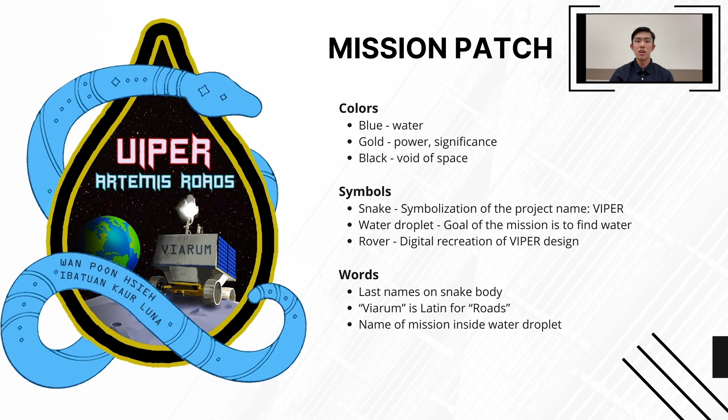Prior to creating the mission patch, we discussed many ideas that could symbolize the VIPER missions. These included adding ice or water, using a snake to wrap around the patch, incorporating past prototype ideas, placing constellations in the background, and using the shape of the Hermite crater, which is where we're going to land our rover. Later on, we decided to add our team name Viarum to the front of the rover, which is Latin for roads, and use colors that would give the mission power and significance. We fused these ideas into a patch, which we hope would stand out in its aesthetics and symbolism.

Our goal is to redesign the Artemis Roads Volatile Investigating Polar Exploration rover, known as the VIPER, focusing on optimizing the wheel design for detecting ice and water concentrations at the Hermite crater located in the moon's north pole. This aligns with NASA's goal to sustainably explore and inhabit the moon.

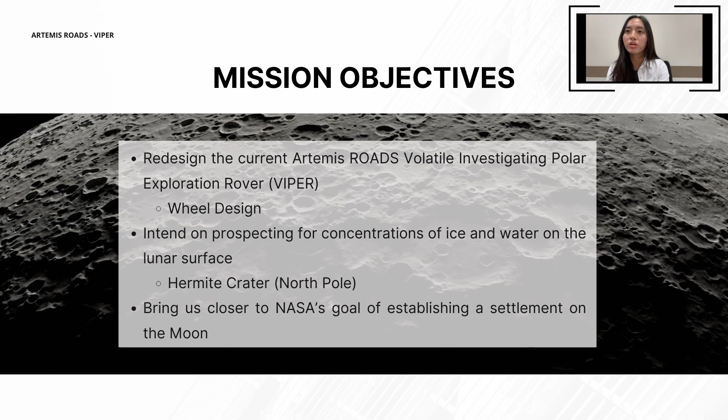Our team's collaborative approach involved extensive research and the exchange of ideas to tackle the challenges of designing a lunar rover. We began by setting our team goals and VIPER mission objective, focusing on enhancing rover performance in the Hermite crater. Next, we examined the current VIPER design to understand its strengths and limitations. We then researched potential improvements and identified the challenges. Throughout this process, we consulted with mentors and NASA engineers to gather valuable insights. Using this information, we designed a prototype incorporating our proposed improvements. Finally, a failure mode analysis was made upon our design to identify possible failure points and build its resiliency.

Artemis VIPER rover stands at 8 feet tall and measures 5 feet in both width and length. It moves at a speed of approximately 1/4 to half a mile per hour and is equipped with several scientific instruments, those being the neutron spectrometer system, the Regolith and Ice Drill for Exploring New Terrains system, also known as the Trident system, the near-infrared volatile spectrometer system, and the mass spectrometer observing lunar operations.

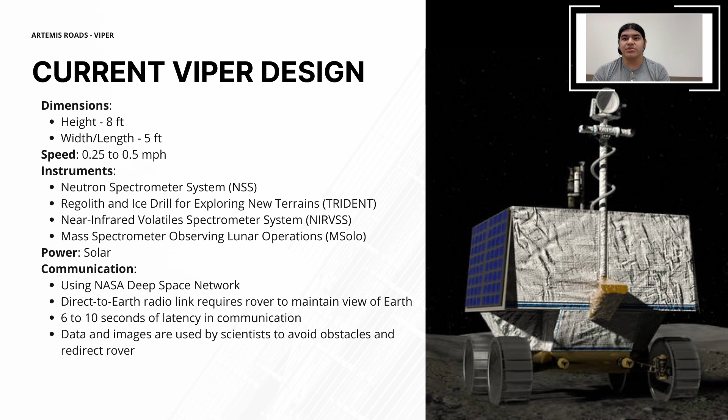Powered by solar energy, VIPER communicates through NASA's Deep Space Network, maintaining a direct-to-Earth radio link that requires a clear view of Earth. Communication has a 6 to 10 second latency, and scientists use the rover's data and images to avoid obstacles and redirect its path as needed.

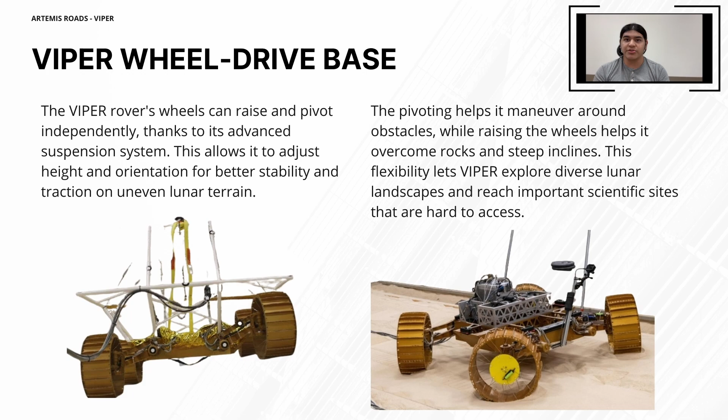The VIPER rover's wheels can raise and pivot thanks to a sophisticated suspension system that allows each wheel to move independently. This capability enables the rover to adjust its height and orientation in order to maintain stability and traction on uneven lunar terrain. This ability to pivot helps VIPER maneuver around obstacles, while raising the wheels can help it overcome rocks and steep inclines. This flexibility enhances the rover's ability to explore diverse lunar landscape, ensuring it can reach and study scientifically important sites that are otherwise difficult to access. This also allows VIPER to traverse the unique lunar landscape and terrain without the worry of a malfunction or damage to the structural integrity of the rover, whether it be the rover itself or its wheels.

In order to simulate the vertical movement of the wheel modules on the VIPER rover, we determined that we had to use a 4-bar lifting mechanism. But what is a 4-bar exactly? Well, a 4-bar lift is a simple mechanical system that is used to raise or lower objects. It consists of 4 bars connected in a quadrilateral shape, with one bar anchored to a base and the other forming a movable parallelogram. As one of the bars is pushed or pulled, the entire structure moves in a coordinated manner, allowing for controlled vertical motion.

We also decided that in order to be able to rotate the wheel, we would have to use a pivot system that could allow the wheel to rotate up to 35 degrees when rotating to either side.

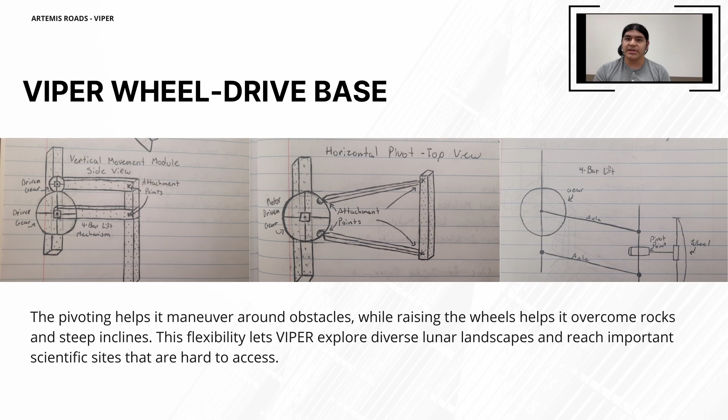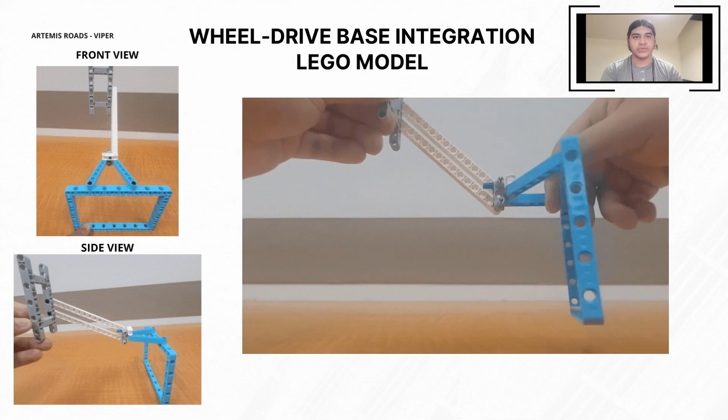In this video, we demonstrate the Lego model we've made. We made this in order to be able to visualize the mechanisms used on the VIPER's wheel modules. This would also help us eventually when we decide to scale the model into a larger structure using VEX parts. What you see here is a scaled up version of the replica we made using Lego parts.

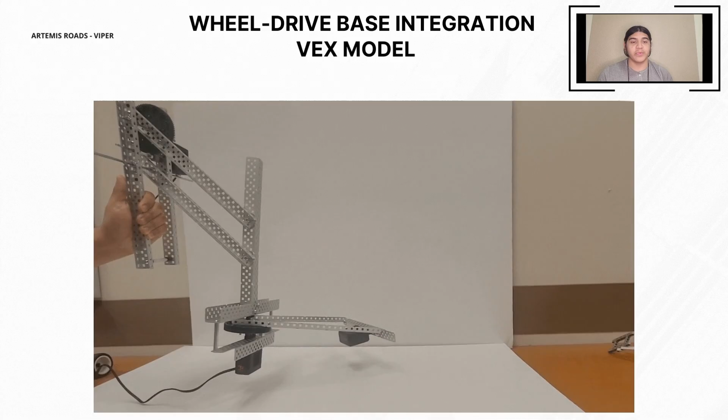However, now we're using VEX parts in order to mechanize the systems and be able to use motors to basically replicate the movements of the VIPER's wheel modules. By building a scale replica of the VIPER's wheel modules using VEX parts, we can have a hands-on understanding of the mechanical systems used and potential challenges of our wheel design.

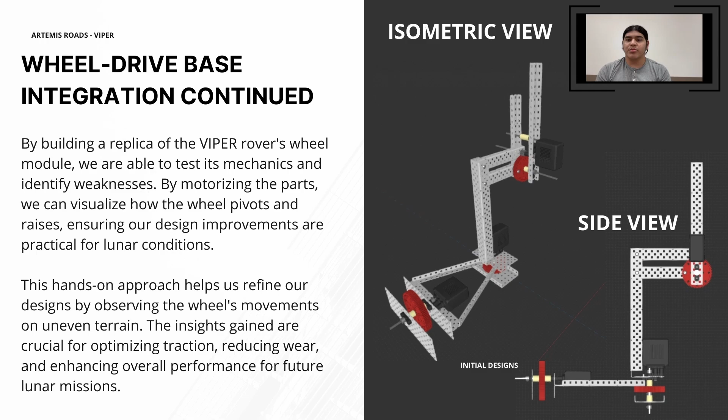By motorizing these parts, we can observe how the wheel pivots and rotates in real time, allowing us to analyze the stresses and strains on various components. This process also helps identify weaknesses and areas for improvement, ensuring that our designed enhancements are both practical and robust for lunar conditions. Additionally, constructing the module creates an iterative design approach, where improvements can be tested and refined through direct experimentation. By replicating the wheels' movements and functionality, we can gain insights into the rover's mobility and stability on uneven lunar terrain.

To further the Artemis mission's end goal of creating a sustainable lunar base, a robust and easily replaceable wheel design is critical for effective moon exploration and habitation. In current and future expeditions to the moon, rovers need to be able to quickly and reliably traverse the lunar terrain for everything from transportation of humans and goods to scientific exploration to the depths of lunar craters.

In order to effectively identify areas of improvement in current lunar wheel designs, we analyzed the existing wheels used on the moon from NASA. We needed a method to compare the effectiveness and durability of various materials. We were fortunate enough to have a discussion with Becca Siegfried, a NASA flight director, who introduced us to technology readiness levels, which indicate how thoroughly tested and ready technologies are for use in space.

To aid our decision to use certain materials in improving the design for the VIPER, we used NASA's technology readiness levels, known as TRL. This scale, ranging from 1 to 9, assesses the maturity of a technology throughout its development.

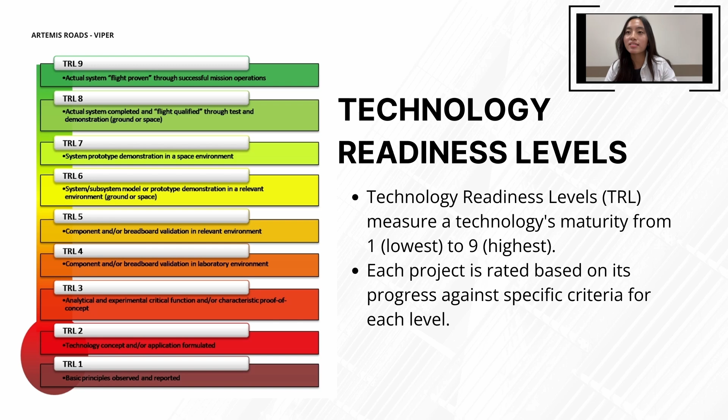First of all, we will be starting with Perseverance rover's wheels. Unlike the lunar surface, Perseverance was built to combat Mars' relatively rocky surface. It is 0.5 meters in diameter with 6 curved titanium spokes to provide better control over rough terrain and small straight treads across the circumference of the surface. These specific components allow the wheel to retain its low weight while keeping with the minimum requirements of Mars' environment.

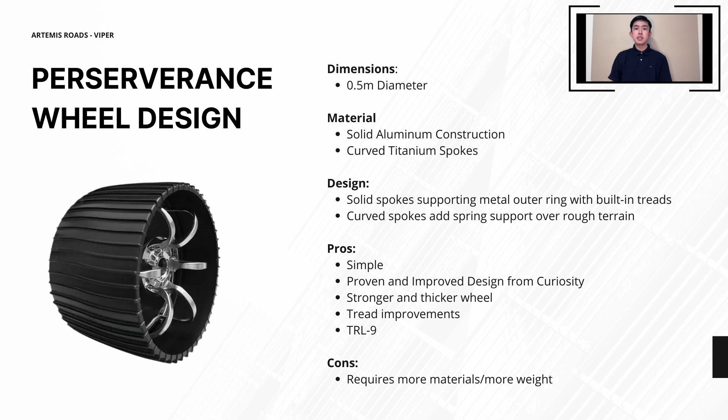The materials, weight, and durability were important considerations during the design process, as well as the TRL rating. Because of these criteria, aluminum and titanium were selected due to their relatively low weight and high strength.

While talking to Mr. Adam Noakes, a lecturer at the University of Texas at Austin, one of the questions we had regarding wheel design was why wheels with mesh weren't used in the current VIPER. He explained that because the intended speed of the VIPER was a maximum of 0.5 miles per hour, there was no need for the compliant design the mesh offered, as it would be an unnecessary use of material in space.

Additionally, Mr. Noakes introduced us to the superelastic tire. The following suggestions made on the superelastic tire were made by Dr. Rajiv Dwivedi, a PhD in mechanical engineering. The superelastic tire uses a woven shape memory alloy, nitinol, to create a tire that doesn't require air. Dr. Dwivedi made some suggestions to increase traction and reduce weight and material.

But after researching more into these suggestions, we realized that while this design provided increased traction, speed, and was a compliant wheel, it was difficult to manufacture, which strayed from our objective of creating a sustainable design that could be used in future settlements on the lunar surface.

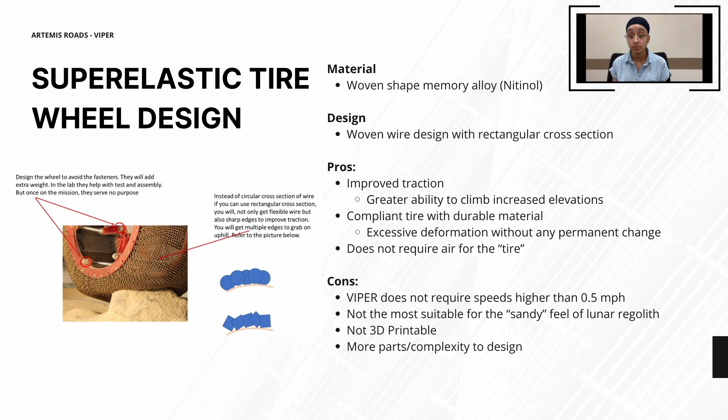The latest revision of VIPER's wheels include many similarities and differences from Perseverance. Its size of 0.5 meters, aluminum build, and spokes mimic Perseverance's specifications. However, due to its use on the lunar surface, it has small shovel-like treads, which are better equipped for traveling through regolith and navigating rocky areas.

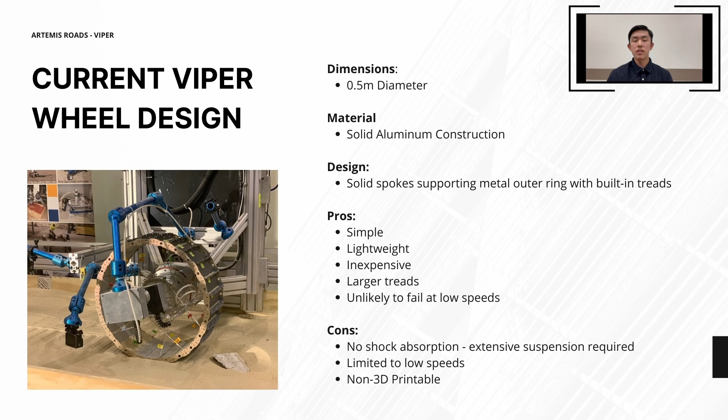It also features holes of varying sizes across its outer rim and treads, which may be useful to reduce weight and prevent buildup of various materials. The wheel itself is meant for low speeds of 0.8 kilometers per hour, using the rover's suspension for shock absorption.

The goal for improving wheel design for the VIPER rover is to combine the successes of past wheels, incorporating features from the Curiosity and Perseverance rovers. With a wheel diameter of 0.5 meters, the design will utilize lightweight and durable materials like aluminum and titanium to withstand the harsh lunar environment. Adjustments will be made to enhance mobility over the regolith, ensuring better traction and stability.

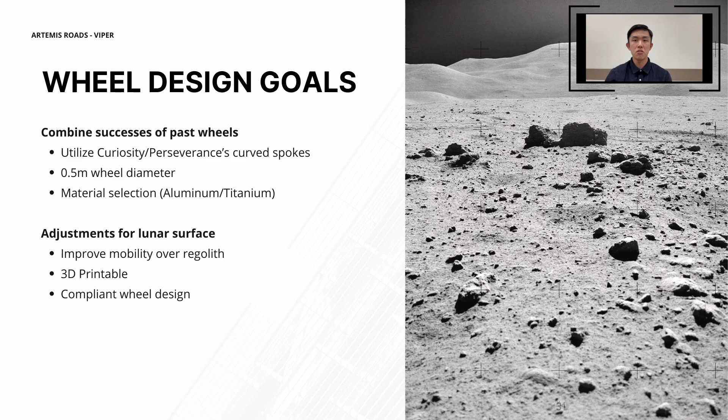The compliant wheel will be optimized for 3D printing, allowing for easy production and maintenance. These improvements aim to boost the rover's capability to navigate and explore the diverse and challenging lunar terrain. After extensive finite element analysis in 12 unique iterations, we came up with the design you see here today.

Utilizing a unibody design while leveraging the ductility of titanium, the wheel is able to absorb shock while traveling along the uneven lunar surface without the need for complex suspension systems. This is accomplished through built-in titanium leaf springs connecting the outer wheel to the center hub, which provide compliance. We extensively studied how the specific geometry and material of the wheel impacts the compliance properties under load, which will be shown in a later slide.

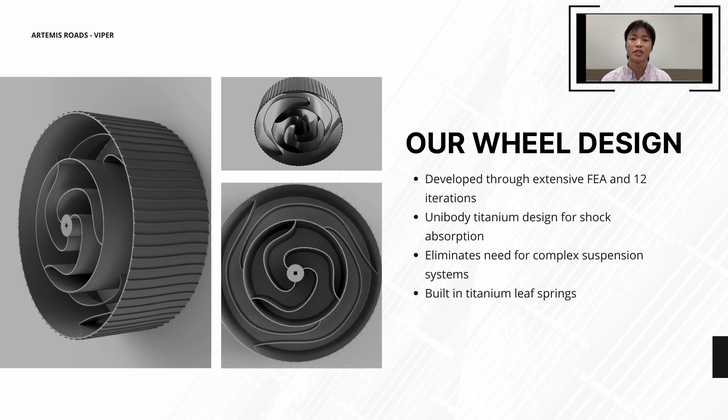A compliant wheel design is critical for higher speed travel along the lunar surface. By increasing contact time through our design, it follows from Newton's second law of motion that the impulse force will decrease, effectively absorbing the impact into the wheel. This allows wheels to travel at a higher speed where large momentum changes are more frequent. This wheel would enable faster travel than currently possible with the VIPER's rigid wheel design. The wheel still preserves the lightweight and simple construction that made the existing design so reliable.

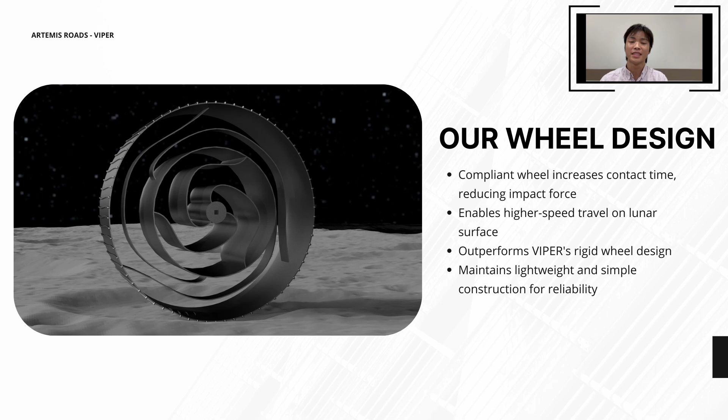Here you can see the wheel geometry up close. The overall wheel has a diameter of 0.5 meters and a width of 0.2 meters. We derived the specific geometry through finite element analysis to maximize the displacement under load while ensuring the wheel doesn't structurally fail.

This primary innovation of the shape is the variable width of our leaf springs. The outer springs are thinner than the inner springs, which helps create a favorable deformation to force profile. Furthermore, the shape is designed to create limits of deformation, ensuring that in the event of a high force on the wheels, they don't move past their limits of elastic deformation. You can see here that if the wheels deform too much, the springs will collide, preventing further deformation. These features all help create a compliant yet robust design that is able to absorb shock without risk of breaking.

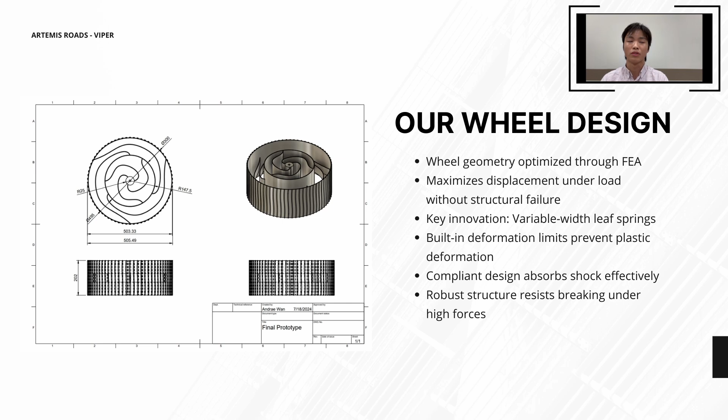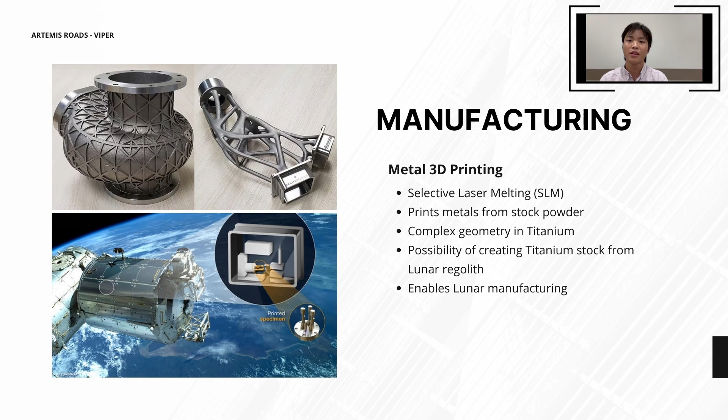The intention of the wheel design is to be produced using metal 3D printing. The ideal technology for this wheel is selective laser melting, or SLM, which uses a powder metal stock, in this case titanium, melting it precisely with a laser layer by layer to build the part. This process is ideal as it produces extremely strong parts at nearly full density compared to traditional manufacturing, while allowing for much more complex geometry not otherwise possible.

As previously mentioned, we used extensive finite element analysis, or FEA, in the development of our wheel. Manufacturing multiple iterations would have taken too long and increased our iteration cycle too much. So FEA became an invaluable tool that enabled us to test and rank our designs with quantitative data rather than just theory. We used FEA to analyze both the geometry as well as material for the wheel.

We primarily utilized Fusion 360's built-in FEA analysis, looking at the displacement as well as safety factor under static loads. Within Fusion 360, we determined that a minimum safety factor of 3 was acceptable. The safety factor is essentially just a number that determines how likely the part is to fail at any given point in the object under a certain load. Anything under 3 is considered dangerous and at risk of failure, so we set that as our minimum acceptable value.

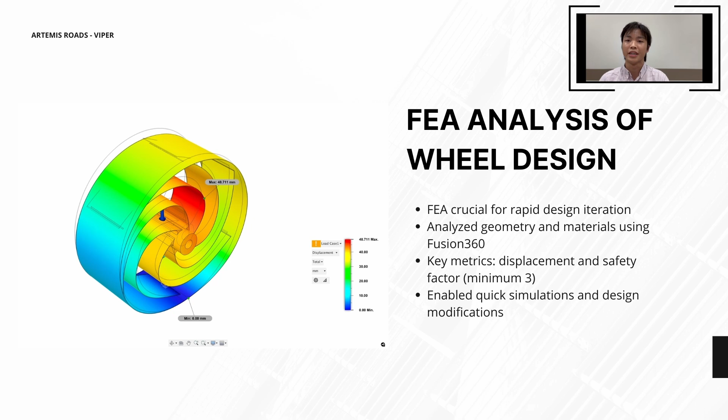At high loads, the use of Fusion 360's built-in FEA meant that we were able to quickly run simulations while altering designs, allowing for extremely quick iteration cycles when compared to other softwares.

To re-emphasize, our design goals sought a 3D printable, compliant wheel design to absorb impact better, increase traction, and traverse the lunar surface at higher speeds. So the main design criteria is to maximize the wheel's displacement, or compression. Of lesser importance but still a consideration is that the wheel should have minimal deformation at rest while maintaining its capability for large displacements. This ensures more efficient travel when the rover is moving at a constant speed with little momentum change.

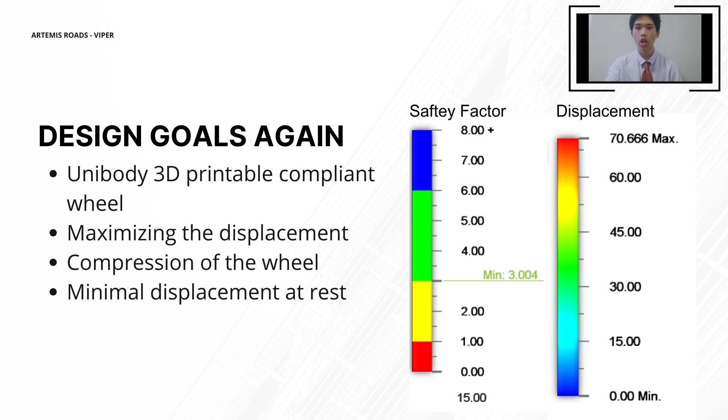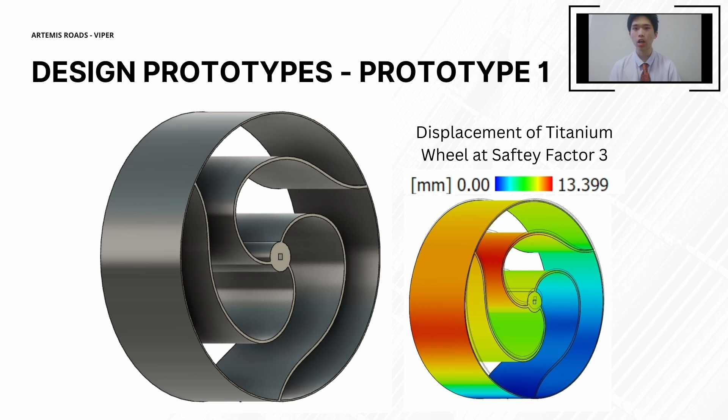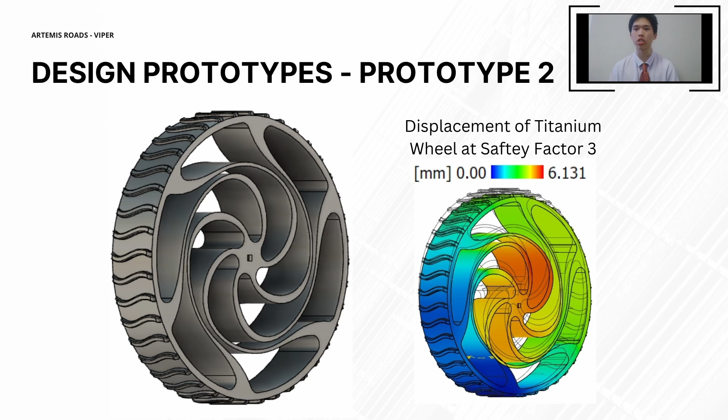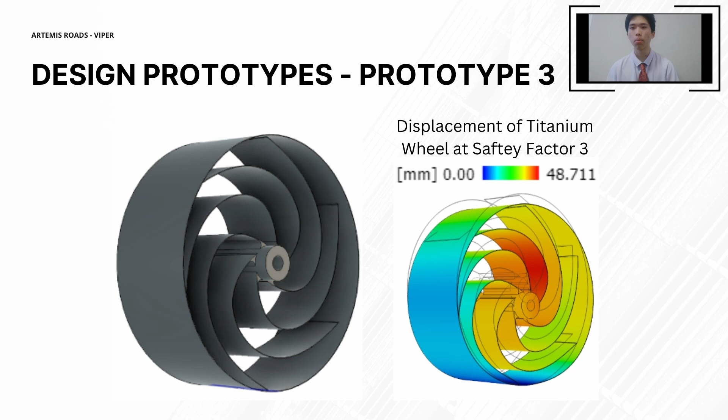Our final prototype utilized the information gained from previous iterations combined with a unique design to optimize for strength and displacement through the idea of integrating a layered design of spokes. The inside wheel has a larger width to increase the strength of the inner spokes that support the load from the rover onto the axle. The outer wheel spokes are much thinner to allow for greater compliance.

With this design, we achieved 70 millimeters of displacement, the greatest amount of displacement we were able to attain at a safety factor of 3. This wheel design allows for deformation of almost 15% while maintaining a unibody design and 3D printability. Additional benefits of this wheel design include possible scalability by adding more layers to optimize for certain properties such as compliance or strength.

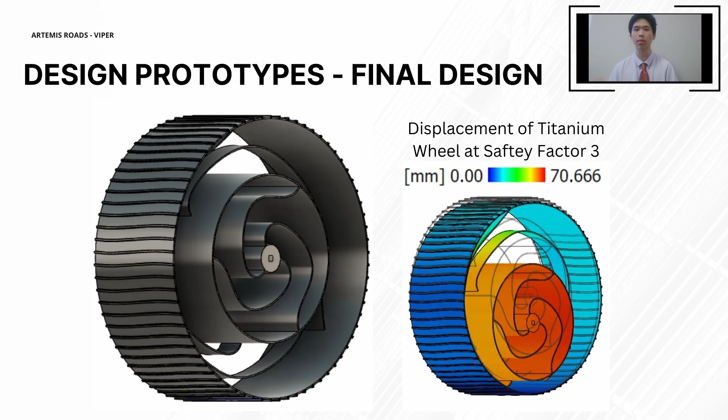To better inform our final conclusions, we collected simulation data in a spreadsheet and processed it in MATLAB. In total, we compared 3 materials: aluminum, steel, and titanium, and 6 different wheel shapes, including our prototypes, our final design, and the original VIPER and Perseverance wheels. Graphical analysis of the displacement of the different wheel shapes and the materials pointed to the best combination of design and material.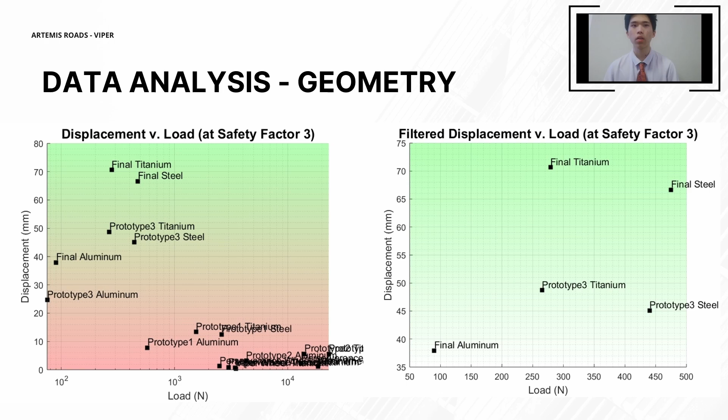Next, we looked at our second objective of maintaining minimal deformation at a rest state of 174 newtons per wheel. Again, filtering out the non-compliant wheels, we are left with a clear graph on the right. The graph shows that the titanium versions of Prototype 3 and the final design best match this criteria, whereas the aluminum model remains too flexible.

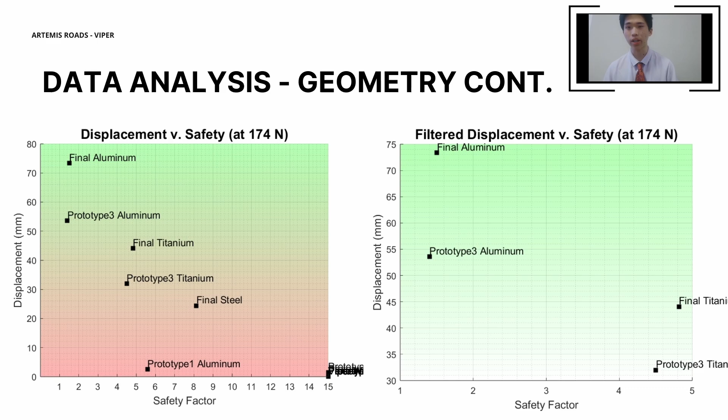Though Prototype 3 has the least deformation at rest, the difference is minimal, and the final design has a greater safety factor, so overall, the final design has the most optimal properties.

Finally, we analyzed the observed properties of each material from the simulation to determine the optimal material. To determine the average compliance of the three materials, we first processed the data in MATLAB, calculating the average displacement of each material at a safety factor of 3. Then we plotted it on the bar graph. From the graphs, it is revealed that titanium is the best option to optimize for compliance.

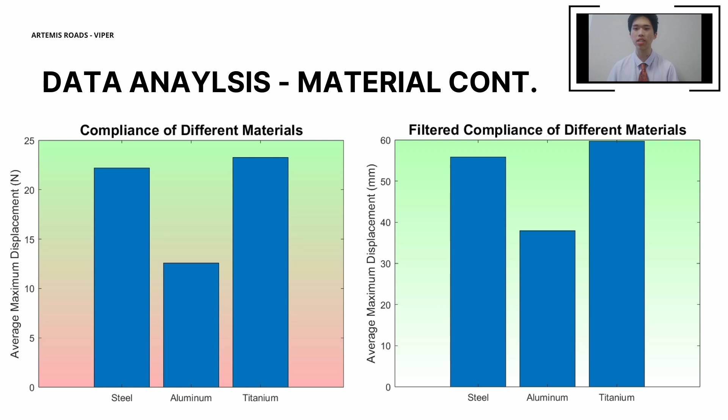We repeated a similar analysis for the average strength of each material by plotting the average maximum load at a safety factor of 3 in the bar graph. Unsurprisingly, steel is the strongest out of the three, then titanium, followed by aluminum, which is the weakest by far.

We can conclude that of the three materials, aluminum is the least optimal, and although steel has the best properties for strength, it is not as compliant. More importantly, steel becomes brittle at low temperatures, becoming unsuitable for lunar exploration of the poles, where temperatures can reach as low as -249 Celsius. Thus, titanium is the optimal material.

In addition, high concentrations of titanium are found on the lunar surface and can be harvested for 3D printing. When talking to Mr. Zebulon Scoville, the lead flight director for the Artemis missions, we learned that NASA is indeed planning to send a 3D printer to the moon and utilize the metals of iron and titanium on the moon to build habitats. This allows our wheel to be cheaply and sustainably produced for lunar rovers and transport on the moon.

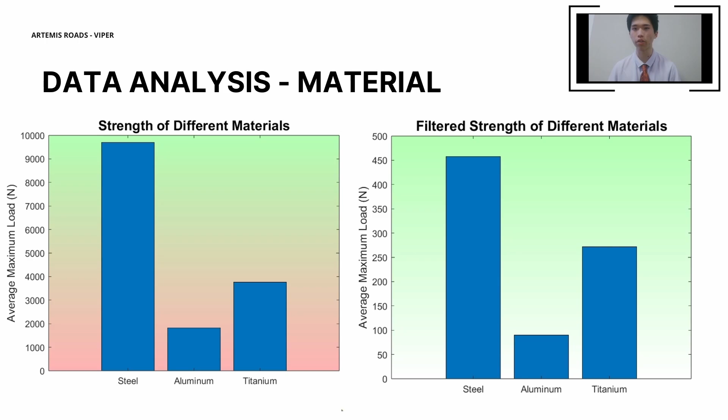Another crucial aspect of wheel design when traversing the lunar surface is the tread design. In order to effectively tackle the quicksand-like environment of permanently shadowed craters, unique geometry is required. We decided on built-in treads much like the VIPER and Perseverance wheels, borrowing the shovel-like shape that was extensively tested on the VIPER rovers with the wavy pattern of the Perseverance treads.

Due to the soft quicksand-like soil on the lunar surface, the shovel shape helps decrease sinkage, ensuring the rover does not get stuck. After talking to Rebecca Siegfried, who worked extensively on the Mars 2020 Perseverance rover, she explained how the triangular tread pattern on the Curiosity rover had issues with durability after years of use.

The corners of the triangles created weak points susceptible to damage from the rocky surface. While the lunar surface is less rocky than the Martian surface, when traveling at high speeds, possible weak points in the wheels need to be limited. Furthermore, the wavy tread pattern is easily handled by the 3D printer, ensuring the unibody design while maintaining high traction across the regolith.

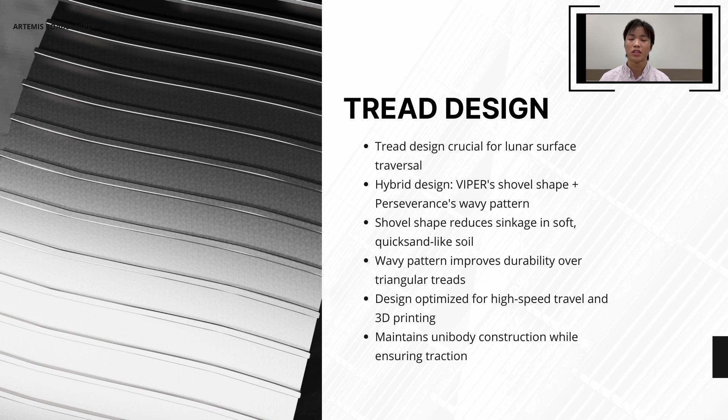The main challenge faced by the lighting plus camera system is the environment it has to endure and the journey the rover has to travel to reach its destination.

While the current design employs a lighting plus camera design in which the lights and cameras are attached separately, our modified design suggests combining both systems to reduce the space occupied. The combined design uses the original navcam design and adds a lighting system around the camera to ensure sufficient lighting in the camera view.

The slight gap between the camera lens and the inside of the lighting ring ensures the camera can change focus while keeping the light in a stable position. Furthermore, we saw that the exposed ridges of the camera's lens in the original design could be degraded by the lunar regolith, which is why our smooth and simple design, seen in Figure 3, prevents lunar regolith from obstructing the functionality of the instrument.

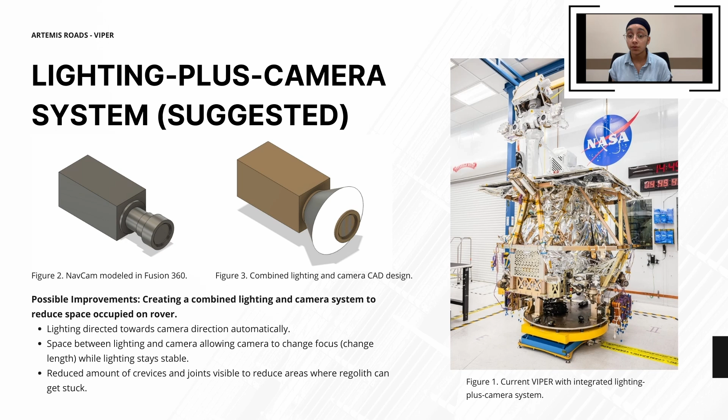Operating in the extreme shadowed conditions of the Hermite crater presents a challenge for the VIPER mission. To address this, a thermal regulation system has been developed in collaboration between NASA and Advanced Cooling Technologies. The system includes loop heat pipes with thermal control valves, which have a TRL of 7, for precise temperature management over long distances.

External ammonia constant conductance heat pipes, which have a TRL of 8, provide passive heat dissipation, and honeycomb radiator panels with embedded constant conductance heat pipes, which have a TRL of 6, provide efficient heat radiation. These tools minimize power consumption and extend mission duration by reducing the required survival heat, while ensuring the VIPER's hardware can withstand temperatures as low as -249 degrees Celsius without relying on active cooling.

The new design will implement the system, which is already highly advanced and tailored to the specific challenges of the lunar environment.

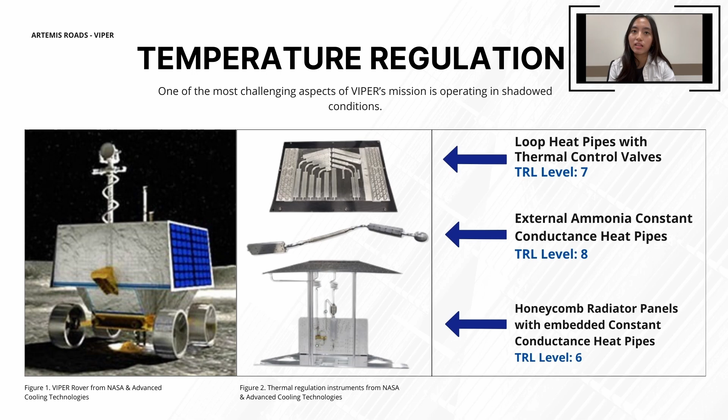One of the challenges we faced during the early stages of our research was difficulty finding details from previous rover wheel designs. With the help of Adam Noakes, a lecturer at the University of Texas at Austin, we were able to find various sources that directly applied to what we were looking for.

One of the highlights of our team was that we were able to use our varying skill sets to contribute to the project. While some of our team members were better with hands-on work, others were better at researching and technological applications. Together, we built on each other's ideas and created our final product.

Over the course of my time here, I've gained invaluable experience working with a like-minded team on real research. This experience has further strengthened my love for engineering and affirmed my desire to pursue a career in space exploration.

During my time in the SEAS program, I've had the opportunity to work extensively in a research environment, while collaborating with other like-minded individuals attempting to achieve the same goals. This experience has strengthened my goals in pursuing a career in aerospace engineering, as it will allow me to continue working on big projects in specialized teams.

Like many before me, I thought the SEAS program was vital in expanding my understanding of engineering. The lectures, assignments, and even long-distance experiences were beneficial in developing my future career.

During SEAS, I had the opportunity to use CAD software for the first time, and I was able to learn how to apply my research abilities in the engineering design process. The SEAS program has deepened my understanding of space exploration and earth sciences while honing my skills in research, problem solving, and teamwork.

This opportunity has allowed me to even apply what I've learned to a real space mission. From the SEAS program, I was introduced to new career pathways while also learning the priceless joys of working with a motivated team. The experience also furthered my resolve to pursue a research career in STEM to experience similar excitement.